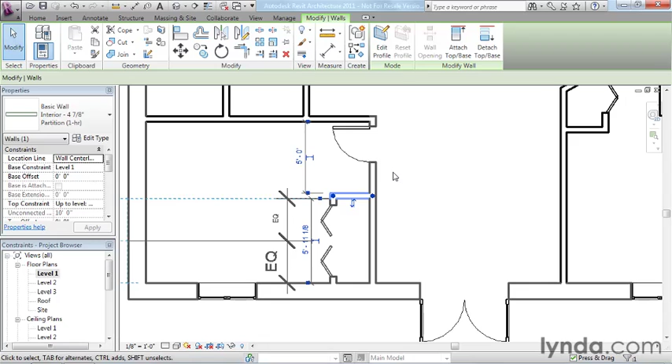Now, what's really powerful about this is it's not just a one-time modification. This is an ongoing constraint that Revit now has applied to that condition. So if I come in here and select this wall and move it, you'll notice the equality dimension stays applied and the door adjusts to stay centered within the closet. That's pretty handy - anytime we make a change, it will keep that change live.

So let's look at another example. Suppose I wanted to simply control the position of this door off of the position of this wall. I can do the same basic process. I'll tab into the inside face of the wall. This time I'll highlight the face of the door rather than the center of the door, and I'm going to place the dimension over here.

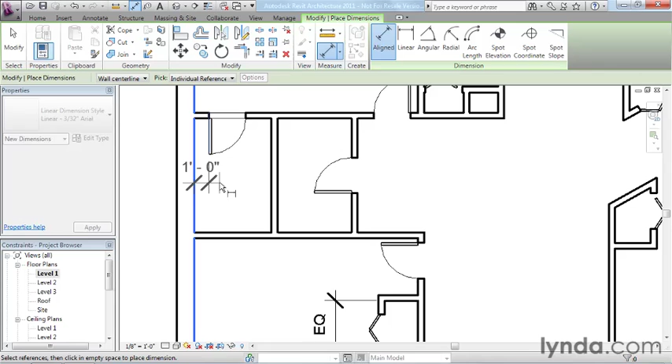So I'm only going to place one dimension this time. I'm not going to dimension multiple objects. Now, right below the dimension, you'll see this little icon - it looks like an open padlock. If I click that, it closes the padlock, and I've now applied a lock constraint to the door's position.

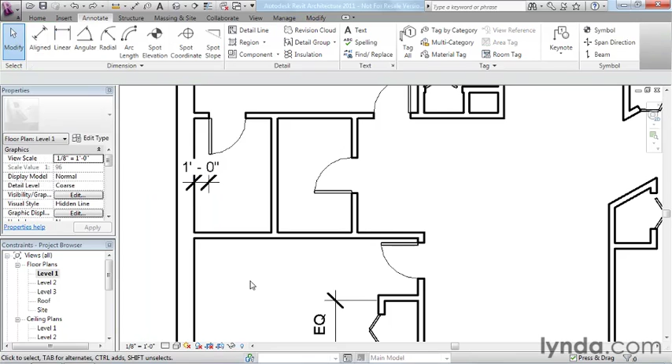The way that one works is, if this wall were to move, it will take the door along for the ride. I'm going to go ahead and undo that because I don't really want to actually make that modification. But now we've built that constraint into the model. I'm going to type ZF here to zoom my window to fit.

What's really handy about constraints is, if you have a certain design condition you're trying to maintain and you want to make sure that relationship gets maintained, you can build that design intent into the model by applying these constraints. Now, I would be remiss if I didn't caution you a little bit: don't go crazy and add constraints everywhere just because you can. Just because you see a little lock icon doesn't mean you have to click it. You want to reserve these modifications for places where they really have meaning and value and where they really add something to your project.

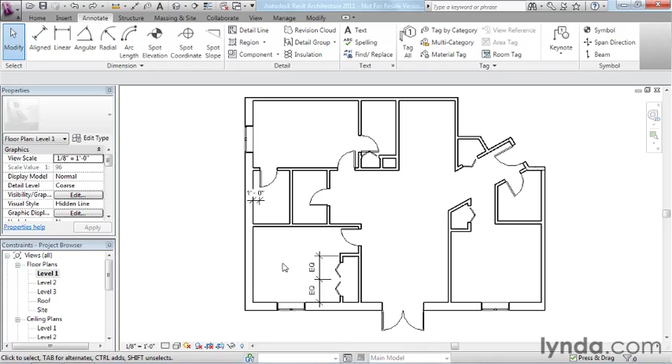Now, I have one more example to show you, and I'm going to do that in a file here called Equality Toggle in the Exercise Files folder. So we did it here with a few doors. Constraints work equally well on any kind of geometry.

So in this case, I have these 4 offices over here on the side of the plan, and they're all over the place - the dimensions are all random. So what I'm going to do is go to the Annotate tab one more time, click on my Aligned Dimension tool, and I'm going to pick this wall, then this wall, then this one, and I'll end up over here. I'm going to pull the dimension out here, and if you look at those numbers, you can see that not a single one of those numbers is the same.

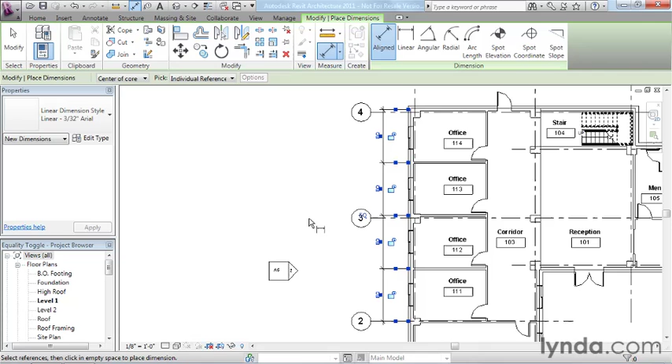Now here's my EQ toggle. I'll just simply click on that and watch the offices when I do. You see how they all instantly snap to equal sizes, and an extra little benefit here is if you select the dimension and right-click it, you can actually toggle off the display of EQ. That's just the default - now that doesn't turn off the constraint.

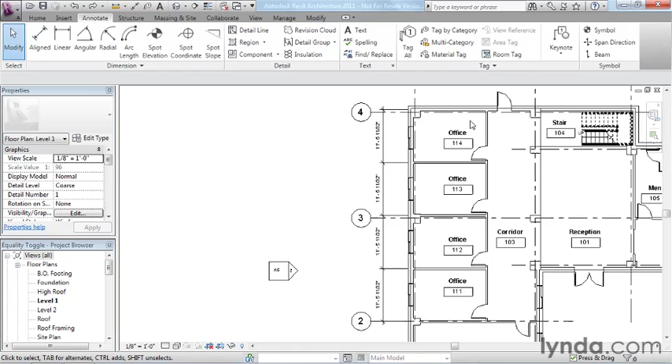So in this case, each office is a little larger than 11 feet 5 inches. They're still equally spaced. So again, if this wall were to move, it will move all of the walls with it and keep them equally spaced. So once again, I'm going to undo that change, but you can see the power of these various constraints that we can toggle on.